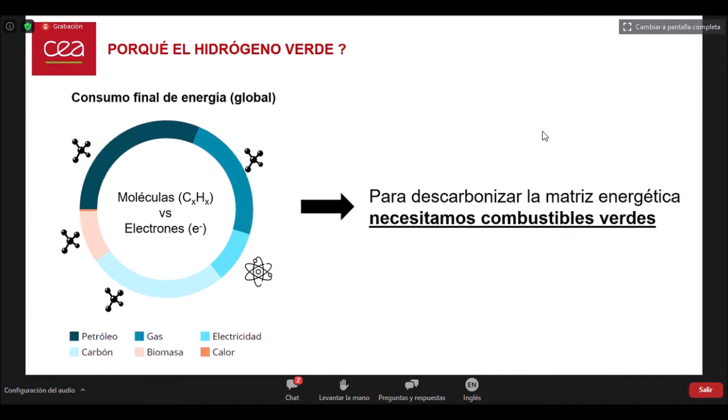Sometimes they talk about zero emissions. I really don't like that term because there's always some emissions. We require materials to produce that energy. We require energy to produce the photovoltaic modules, and that energy has not been decarbonized. So this partly answers Martin's question, and I'll be happy to elaborate later.

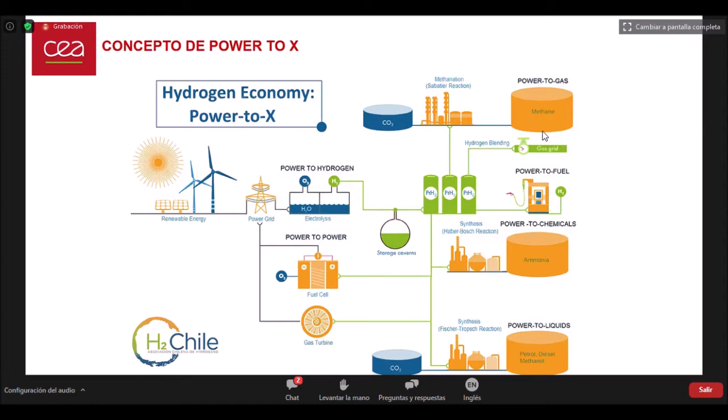Deep down, because of its versatility, hydrogen can be introduced almost anywhere in our energy or power grid. So having explained these concepts around green hydrogen, I want to present to you CEA-LITEN, which is the French Institute for Energy Transition. CEA-LITEN is focused on 4 areas.

Our mission is to support the industry towards energy transition. We were created to support the industry, the private sector. We are a public entity, a public center, but almost half of our budget comes from direct contracts with the industry. How do we do it?

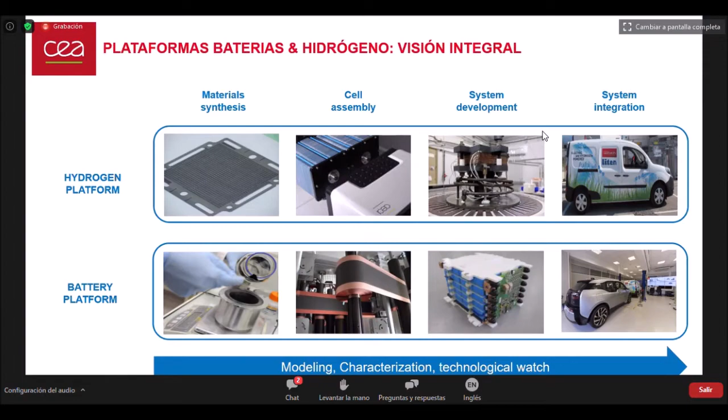We have platforms to test out our technologies and also other commercial technologies to generate techno-financial databases that will allow us to have a future vision of the technologies that are coming and the technologies we need to bet on in the future.

So at the level of hydrogen, our role has been to generate demonstrators and pilot projects with the industry. Here I'm just showing you a few examples.

I would also like to mention the project Hyway, because this project has involved private off-takers and delivery companies. This was the first fleet, and the largest fleet, of hydrogen vehicles that still work, developing the value chain of green hydrogen from production to the final use.

In this case, it is electric mobility. I want to mention this because it allows us to articulate and coordinate the different stakeholders across the value chain, from production to the final use, also involving clients that still do delivery with these vehicles.

I believe that this is important, and this is something that the Chilean government is interested in. To boost the green hydrogen industry, we need to involve all the sectors at an earlier stage, even the clients, the buyers who are going to buy hydrogen.

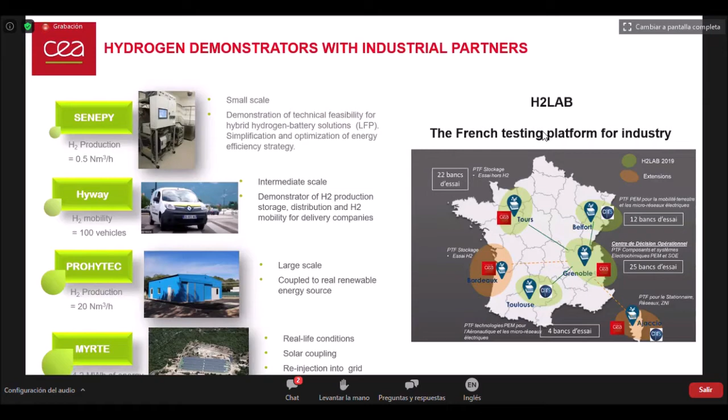This is an example of a successful technology transfer. For the green hydrogen economy, this starts with electrical generation, and we focus mainly on photovoltaic modules. Then we need electrolyzers to produce hydrogen, and then we have fuel cells at the level of end use of hydrogen. These projects take time, about 15 years from the strategic decision, based on our technological surveillance, databases, and all the information we manage, where we decide to focus on a specific technology.

In the case of photovoltaic modules, we focused on a specific technology, which is highly bifacial. At the time, nobody was betting on bifacial, but now most photovoltaic plants being built use this technology, so it was a good bet on our side. It allowed us to develop, from this strategic decision, the technology, the proof of concept, and pilot demonstrators, until we were able to produce this technology, which has been manufactured in Italy. We are testing it out in the Atacama Desert to evaluate the performance of photovoltaic modules in desert conditions, always with the end goal of reducing the cost of photovoltaic energy under desert conditions.

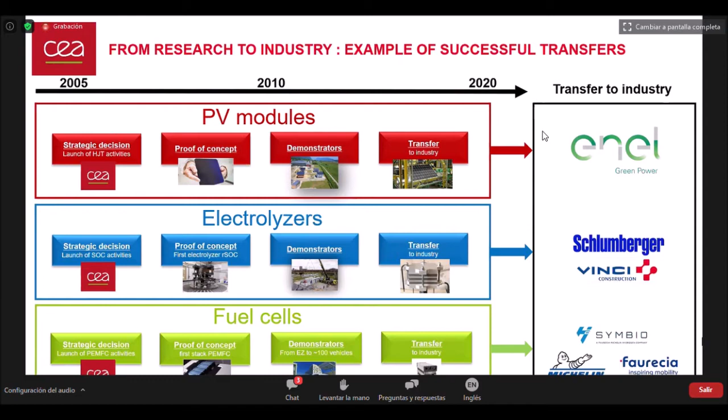Symbio, sorry. It was recently bought by Michelin and Faurecia. At first it was a startup, but it has been bought by Michelin now, so it is no longer a startup - a successful case.

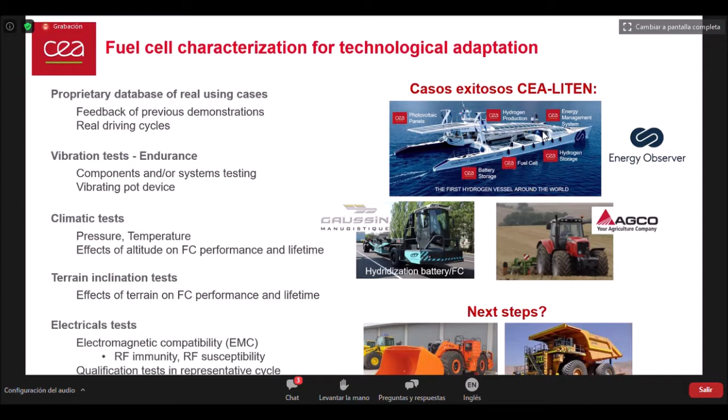We have all the infrastructure to test it out and characterize it: climatic tests, vibration tests, terrain inclination tests. Our goal in Chile, as mentioned by Martin, there's a very important theme in terms of mining trucks and the electrification of these mining trucks. Our goal is to support the industry in developing technologies adapted to altitude, as many mining operations work in specific terrains and at very high altitudes, requiring technological adaptation.

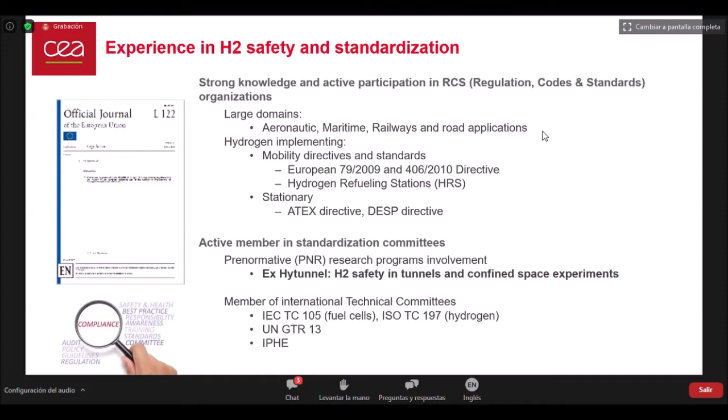We have several experts in terms of security standardization worldwide. We can share that experience in Chile and Latin America. Our intention is to contribute that experience in everything related to regulation and standardization of green hydrogen in the economy. This is just an example from the battery session.

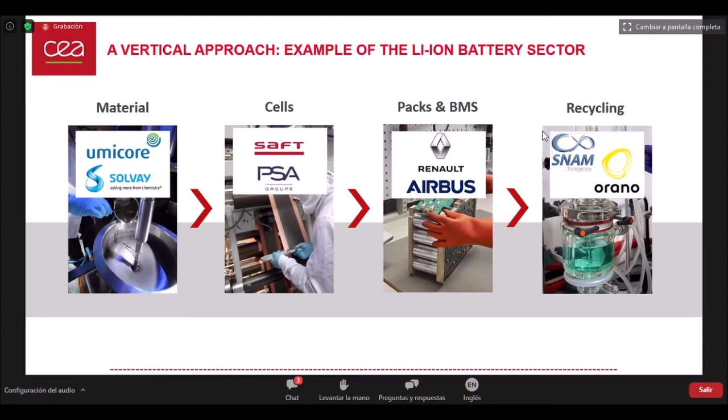Just to show you, we also have a role as industry coordinator across the value chain in the economic sector, in the case of lithium batteries. Unfortunately, I have a slide for hydrogen as well, but I can't show it yet because there's some confidential work with certain researchers.

Just to finish: how do we support the industry? Through technology transfer of intellectual property, knowledge, characterization of technologies, testing, improvement, adaptation of technologies, and we can also provide training. In Chile, we have that, we've been doing it, and we intend to continue strongly training in Chile and Latin America.

For example, the picture you can see here is a pilot plant of photovoltaic modules in the French Alps, which served to train the people of Enel so that they could have their own factory of modules in Italy.

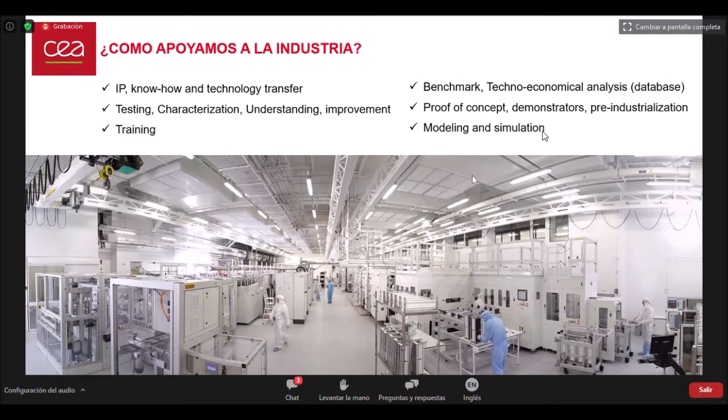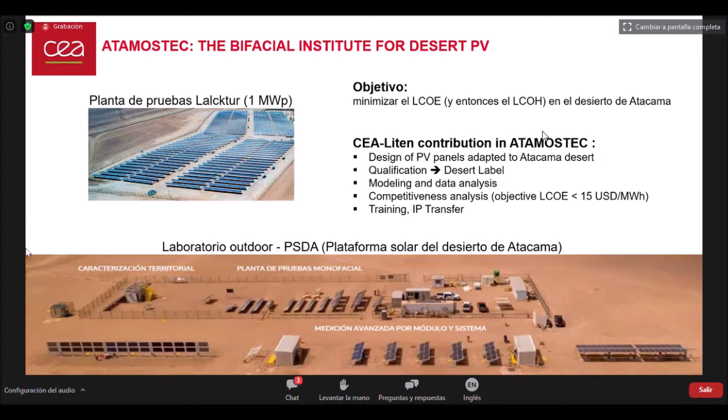Of course, we can also do technological benchmarking, technical and economic analysis, etc. I just wanted to mention the Atamostec project that brought us to Chile. Atamostec is one of the programs mentioned by the Chilean government, which I think stands for the Institute of Bifacial for the Desert. The objective of Atamostec is to minimize the cost of electric energy and green hydrogen in desert conditions, so we have test plants at the industrial level and also at a smaller level to test different technologies in desert conditions.

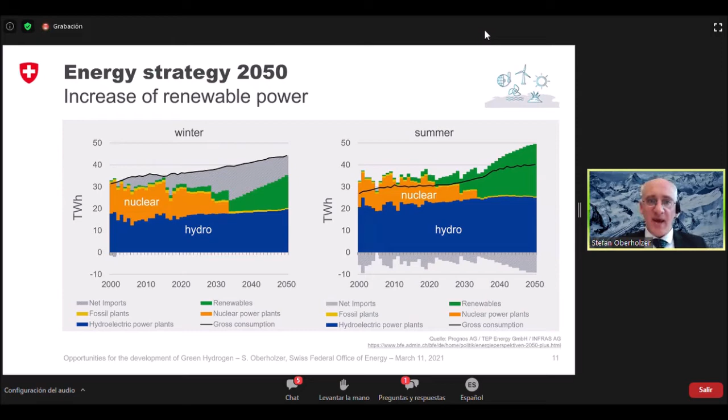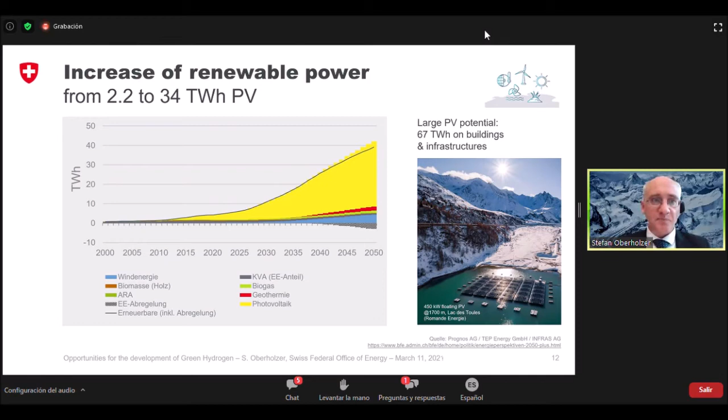Si hablamos del hidrógeno verde y vemos los detalles de las perspectivas energéticas al 2050, los proveedores de energía basados en electricidad, que incluyen hidrógeno, se necesitan para llegar a este objetivo cero, especialmente en el sector de transporte. Necesitamos socios y dependemos mucho de la producción nacional, pero también hay hidrógeno que se importará. Aún no queda claro de dónde vendrá, cómo vendrá, si será a través de la matriz de gas o líquido o amoníaco u otros vectores. No tenemos una estrategia nacional aún, sin embargo se nos pide desarrollar esto a nivel de políticas.

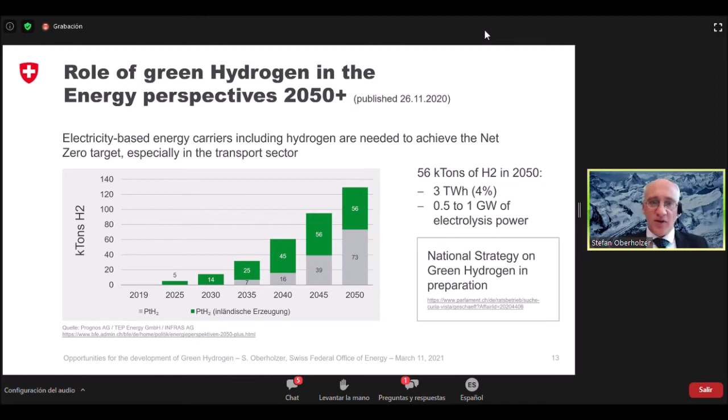En la siguiente sección les voy a dar un vistazo general muy breve acerca del hidrógeno en general en Suiza. Alrededor del 95% del hidrógeno que utilizamos a la fecha hoy en Suiza es fósil o gris, y se produce principalmente por refinerías y se consume directamente allí.

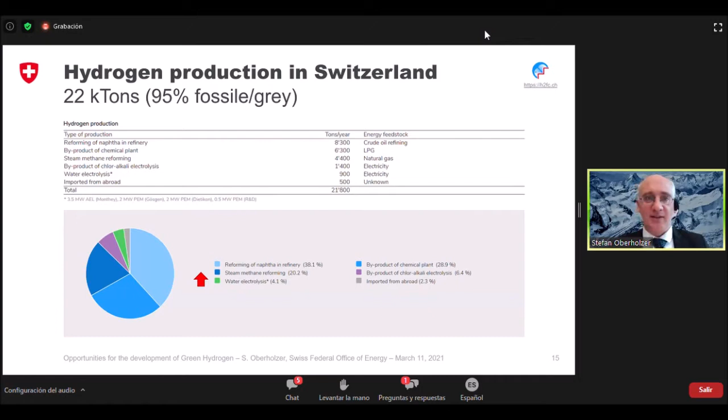Lo que vemos aquí es que por primera vez también la electrólisis empieza a surgir, alrededor del 4%, y es verde en el sentido de que se utiliza electricidad o energía que tiene una huella de carbono muy baja, porque la energía hidroeléctrica es de alguna forma la mejor. Como se había dicho antes, se utiliza en refinerías, pero también en la industria química o farmacéutica o en la industria de procesamiento de metales.

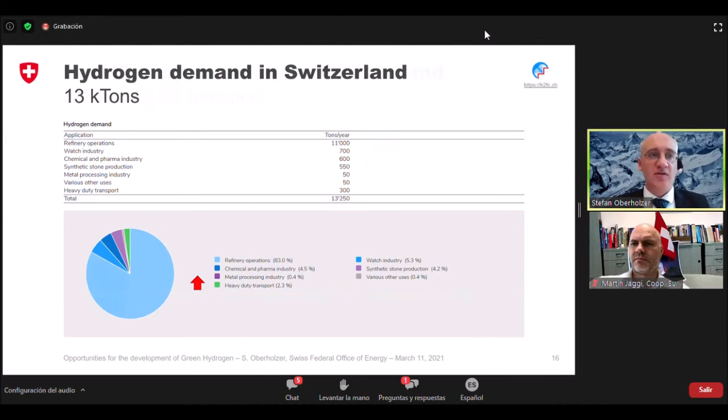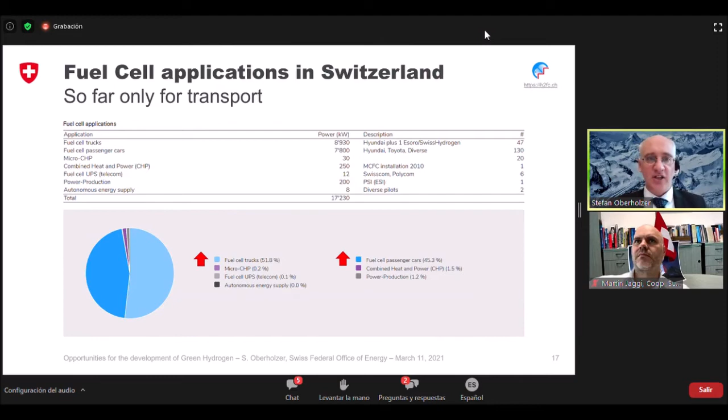Lo que también se ve aquí por primera vez es el transporte pesado, que realmente está creciendo en aplicaciones de celdas o pilas de combustible. Las celdas de combustible se utilizan en Suiza solamente para el transporte ahora. Ha habido algunas pequeñas aplicaciones para calor combinado y energía, pero no como en otros países. También hay algunas aplicaciones fuera de la red eléctrica, como por ejemplo para respaldo de telecomunicaciones, pero lo principal, como ustedes pueden ver en azul y en celeste, es para el sector transportes.

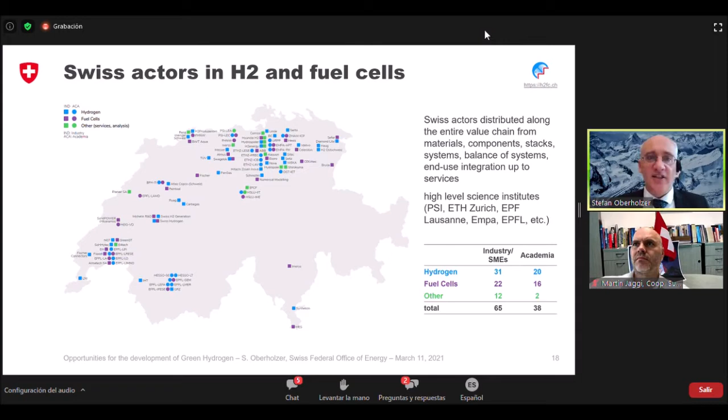En este mapa no quiero entrar en los detalles porque ustedes van a encontrar la información en esta página web. Incluso aquí pueden ver un vistazo general de los actores de la industria y del área de investigación. El mensaje que quiero transmitirles es que hay muchos actores y no son los grandes actores, los fabricantes de equipos originales como en otros países, sino que también son empresas especializadas, pequeñas y medianas, que son activas aquí, y también hay centros de investigación altamente calificados.

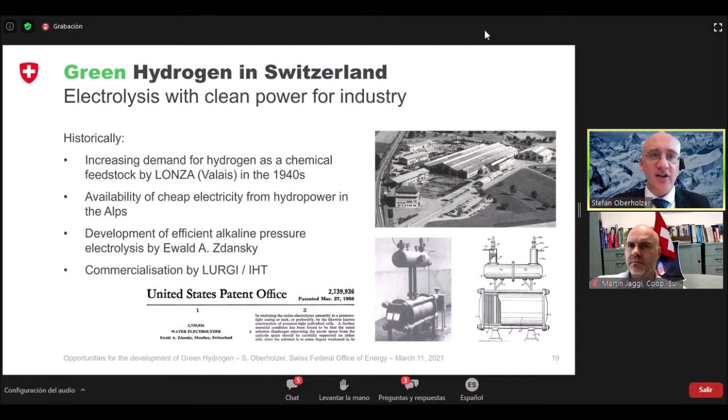Con respecto al hidrógeno verde en Suiza, esto tiene una historia muy larga. Ha habido una demanda creciente en el último siglo, alrededor de 1940, para utilizar el hidrógeno en Suiza como alimentación química, de hecho para la producción de amoníaco, y al mismo tiempo había la disponibilidad de electricidad barata de la energía hidroeléctrica que se construyó en ese momento en los Alpes. Entonces había la idea de desarrollar una electrólisis de presión alcalina eficiente para mejorar el hidrógeno per se, y esto de hecho acabó en la comercialización por parte de LURGI con una tecnología de electrólisis eficiente. Esta tecnología de electrólisis de hecho sigue siendo utilizada, como ustedes pueden ver aquí.

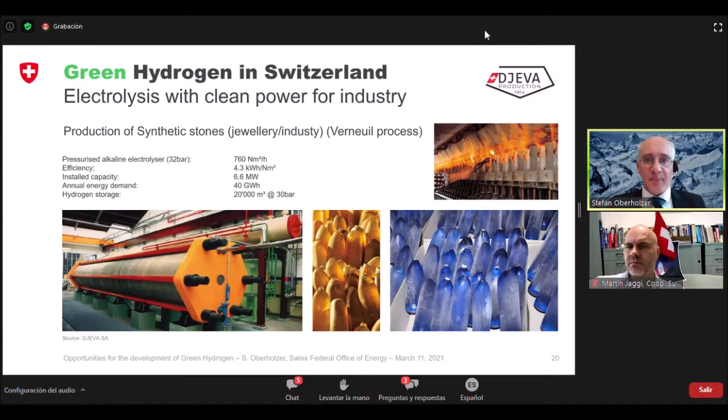Lo que ustedes ven en la foto es el electrolizador más grande de Europa, uno de los más grandes del mundo, de 4.3 megawatts, y dos de ellos siguen estando en operación. 6.6 megawatts, perdón, y es una empresa que produce piedras sintéticas, zafiros, etcétera, y se necesita el hidrógeno como fuente para producir calor de alta temperatura. Esta tecnología, de hecho, ha sido comprada hace unos cuantos meses por una empresa alemana que se llama Sunfire, y lo que quiero mostrar aquí son las diferentes tecnologías de electrólisis para la producción de hidrógeno.

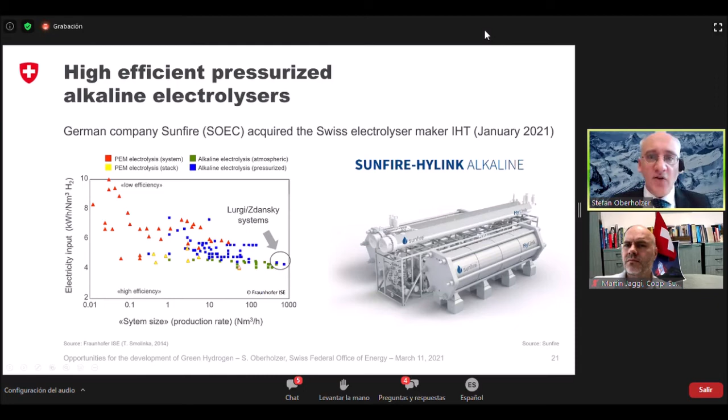Por lo tanto, en los siguientes años vamos a tener 20, 40 megawatts que vienen, y lo mismo es cierto para todo el continente europeo. Veo muchas iniciativas que están en curso. Con respecto a la investigación, también estamos apoyando proyectos que abordan el hidrógeno verde de otras fuentes que no son la energía eléctrica, principalmente solar, directamente.

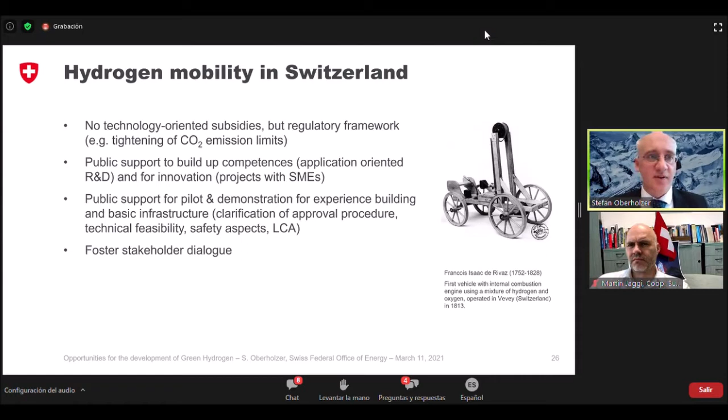Lamentablemente, ya no está en curso, se ha detenido, pero muestra una gran confiabilidad operativa, y la experiencia de aquí también se está utilizando ahora en otros proyectos.

Para los camiones, tenemos un par de proyectos del año 2016 al año 2020, algunas demostraciones para demostrar cómo es que funciona producir hidrógeno verde de energía de corriente de río, cómo almacenarlo, cómo producir las primeras estaciones de recarga de hidrógeno que estaban completamente integradas y realmente accesibles por el público, y una estación de investigación y desarrollo, y también un camión piloto que fue construido para demostrar toda la cadena.

A la fecha es Hyundai que entrega los camiones a Suiza. El despliegue de la infraestructura está en curso, es decir, 6 estaciones de recarga de hidrógeno ya están operativas, y eso ha sido desarrollado en el marco de tiempo de 2 años, principalmente sin subsidios, y se basa en un modelo de negocios que se va a presentar el día de mañana.

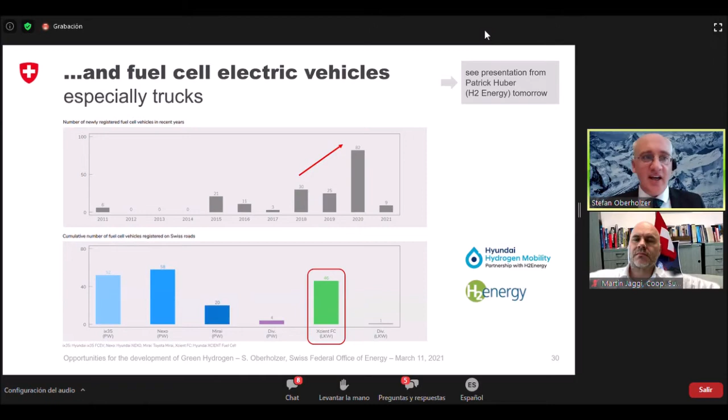Energía a gas también se mencionó antes. En la charla previa también hay actividades en este campo. Por ejemplo, un proyecto grande de 2.5 megawatts, electrólisis PEM, que utiliza el CO2 de una planta de agua residual para producir gas sintético, y este gas sintético luego va a alimentar la red de gas que se utiliza para calefacción y otras aplicaciones. Por lo tanto, no tiene nada que ver con movilidad.

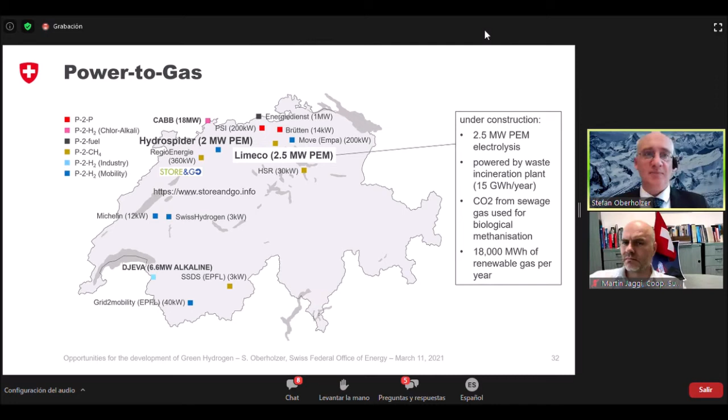Sin embargo, el motor principal para el hidrógeno en Suiza es la movilidad. Finalmente, unas cuantas palabras de nuestros programas. Tenemos varios programas diferentes en la oficina suiza de energía para apoyar la investigación, el pilotaje y demostración en diferentes tecnologías, 1 o 2 programas también para hidrógeno y celdas de combustible.

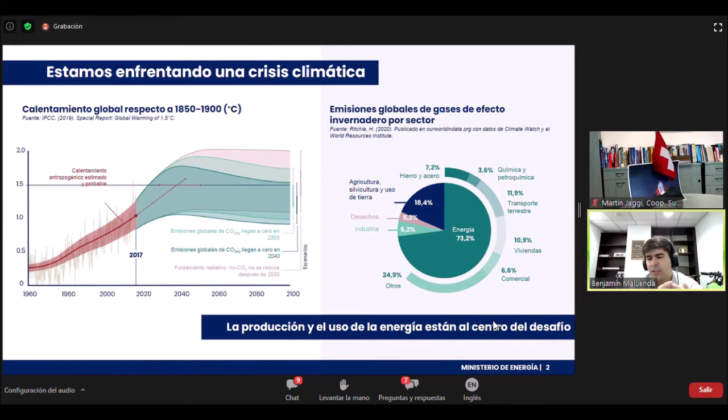And this is where hydrogen becomes an interesting resource or alternative.

Our work in the ministry is based on the characteristics of our country. I insist that many of what I'm going to say for Chile can also be applied to many countries of the region which have a similar geography, and they share similar geographic characteristics. We have a very good potential for renewable energy, solar, photovoltaic, wind, geothermal, sea energy. There's a lot of energy wealth and richness in this country.

And what is interesting about this, and this actually generated the interest of the Ministry of Energy, is that the potential of renewable energy significantly exceeds the capacity we have to consume it. All the potential of renewable electrical power of Chile, which is over 1,800 gigawatts, exceeds 70 times the capacity of our current system. So even if this electrical system continues growing and we electrify consumption, we will never be able to take advantage of all this wealth of renewable resources.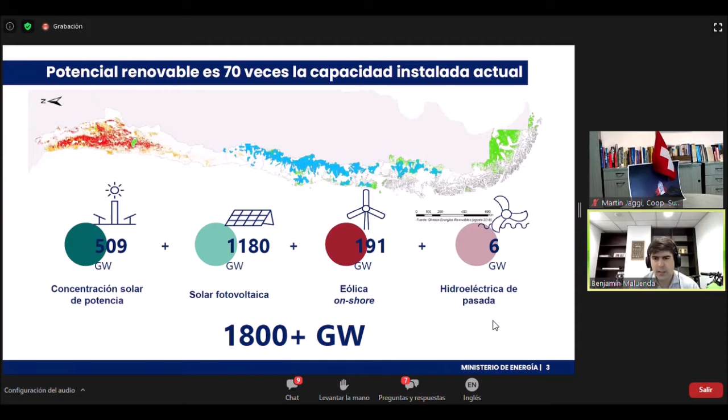So we need to find a way to take advantage of these resources to produce something, to have a sustainable renewable economy, and hydrogen becomes an appealing option to do so.

Why? Because hydrogen is a way of packaging electrons, renewable electrons, into molecules, gas molecules in atmosphere conditions that can be compressed, it can be liquefied, it can be transformed into other products for transportation, and they can be used in a number of various applications.

My predecessors have already significantly explained these applications, so I am not going to repeat them, but the important concept here is to think about hydrogen as a renewable energy carrier, to put renewable energy into consumptions and technologies that have historically never used renewable electrical power.

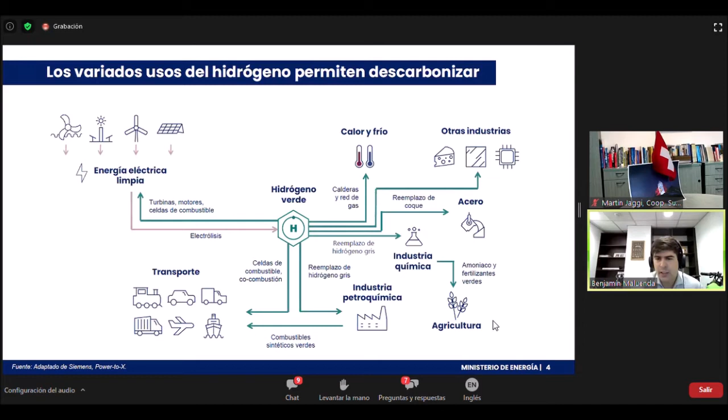So we always need to remember that hydrogen in the end is a means to decarbonize, and it is not an end by itself. So why do we have so much interest on this in Chile? And why is it that we decided to launch this strategy?

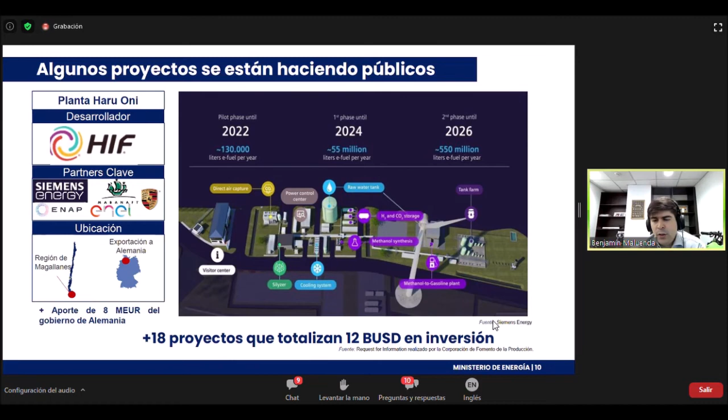We have also identified many other investment projects that are under development, but they are still confidential. And this strategy is based on several pillars.

Once again, I will send you a copy of the presentation to read at your own pace. But we have generated a plan of action based on this, which is quite ambitious, but hopefully it will help us materialize the opportunities I have explained before.

We have broken down our action plan into 4 lines of work: regulation and permits, financing and incentives, domestic demand and international partnerships, and local development. On these 4 areas there's a lot that can be done, and there are other important areas.

What I'm going to show you now is just our short-term focus for 2021. Evidently there are many other actions that we should also take. I will focus on one action per axis, so I cannot elaborate on this. In the Q&A session you can ask me more about this.

In terms of regulation and permits, our focus is to develop all the necessary standards and regulations as soon as possible so we can reduce the risk of developing projects. So investors, developers, researchers, providers, suppliers, everybody knows the rules of the game beforehand, so they can make decisions on investing, doing research, and doing business.

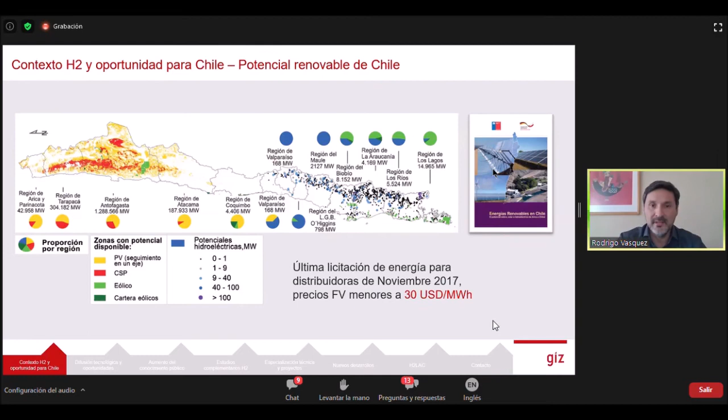Well, here we do not see the Patagonia region, but in the south we have a lot of wind, and we can generate a lot of energy, many times more than what we have or what we demand. Therefore, all of this energy can be sent to a green hydrogen market to be used in the country and also to export to other markets.

Now, how did we start to socialize this? It is true that there were a lot of previous meetings before the first conference, and we started talking about doing some sort of workshop or technical meetings. But there was so much interest that in 2017 an international conference was held, and more than 120 companies arrived and asked what this was about and why we were interested in showing this, and what were the potentials. Then later there was a snowball effect.

Then in 2018, we organized together with the Ministry of Energy a second conference, and we had more than 420 participants, most of them companies, people with good connections. A lot of international people came to give presentations here in Chile, to talk about the projects they had, the ideas, the trends at the international level. I think that was the starting point for all of the development we are seeing now, all of the conversations, all of the planning of all of the companies here in Chile.

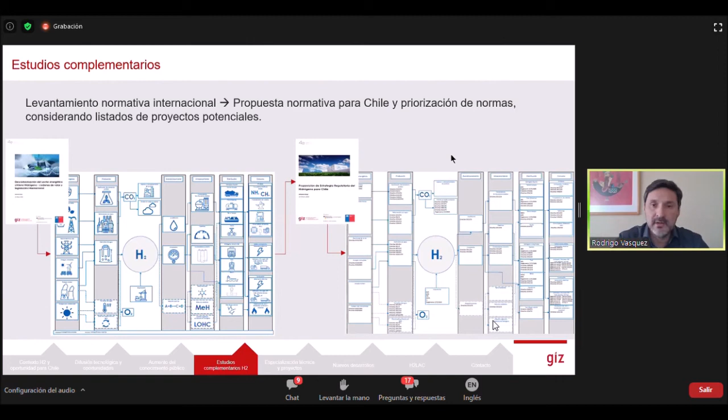What was important was to make a match with the projects that were ongoing and how we could prioritize the regulatory advancement. On the other hand, and this was the initial question, what are the environmental impacts of hydrogen projects? In that regard, we also made a study to identify what impacts these projects could generate in the future.

That meant analyzing the value chain. What was determined was that, as an element to generate hydrogen, the projects have a very low impact, but the impact is in the storage of hydrogen, or also the construction, or electricity generation, and everything related to transmission. Therefore, hydrogen's perspective is very good in environmental terms, not only in terms of its usage, but also in the building of the projects.

Now, regarding financing sources, there is the option of climatic financing, and there could be a generation of a list of green financing sources. Chile is a country that has graduated in terms of this type of cooperation, and Chile can actually apply to these funds to generate these types of projects in the region.

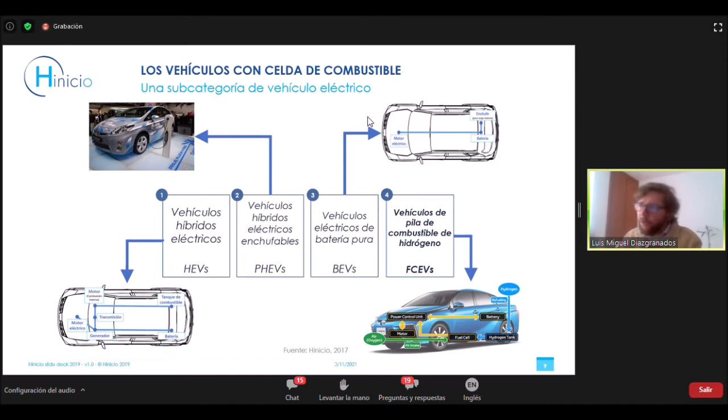An important topic is hydrogen. We know the funds for hydrogen always have their feet on the ground. We know this is done step by step. But what is important is what will be the results of it, in terms of employment, what we will receive as a country, not only because of the projects, but also the export, etc. So what about electrical vehicles at the end of the day here? I would like to tell you more about this.

So how does a fuel cell vehicle work? First of all, we use hydrogen, which is refueled in tanks. This hydrogen is typically refueled or recharged in all the models we currently have. 99% are recharged in a gas manner, but at very high pressures, at 350 bars. It could be 350 of atmospheric pressure up to 700 bar. We're talking about a lot of pressure.

Why? Because hydrogen has a high energy per unit of weight. If we take 1 kilogram of hydrogen versus, for instance, 1 kilogram of diesel, the kilogram of hydrogen is going to have 3 times the energy of the diesel kilogram. Nevertheless, it is an element which is not very dense, the lightest element of the periodic table. Under normal atmospheric conditions, 1 kilogram of hydrogen is equivalent to about 11 cubic meters of volume. We do not have the space in a vehicle for 11 cubic meters, so we need to compress this hydrogen to take those kilograms of energy and fit them into a smaller volume. That is why we use high pressure tanks for hydrogen powered vehicles.

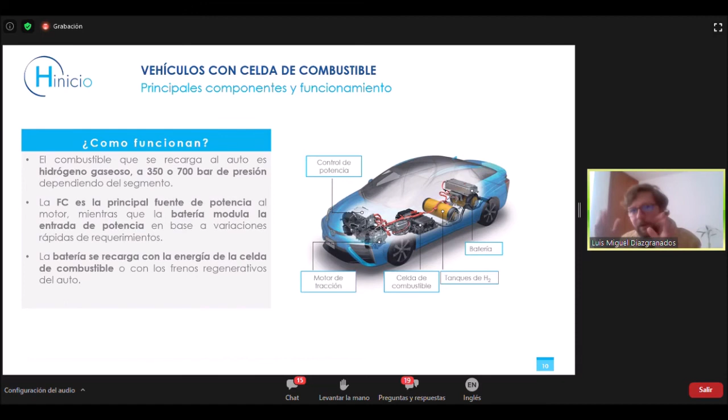But when we have a downslope, the power required is much less. The fuel cell keeps operating at its optimum point, but the difference in electricity is used to recharge the battery. In this case, the battery does not need to be connected to the grid or to a charging point; everything works with the electrical charge. So this is the vehicle, and all this energy goes to an electrical engine. Here we are showing it for a light duty vehicle, but the same logic applies to all other vehicles.

So what are the differences between hydrogen and battery-operated vehicles? Well, there are some from the technical perspective, but from the operational point of view, battery-operated vehicles have recharging times that are very high. A rapid recharge could be half an hour or 40 minutes, and a slow recharge 8 hours. These recharges give us autonomies that are relatively low, maybe 200 to 300, nowadays 300 to 400, but there are limits to the autonomy a battery-operated vehicle can deliver.

However, the hydrogen-operated vehicle can recharge at very high speeds, equivalent to recharging at a petrol station. As I said before, hydrogen is an excellent way to accumulate and store energy. We could have autonomies a lot larger than what we'd have for battery-operated vehicles. For light-duty vehicles, we could be speaking of 550, 750 kilometers - autonomies that are very large and facilitate the operation of the vehicles.

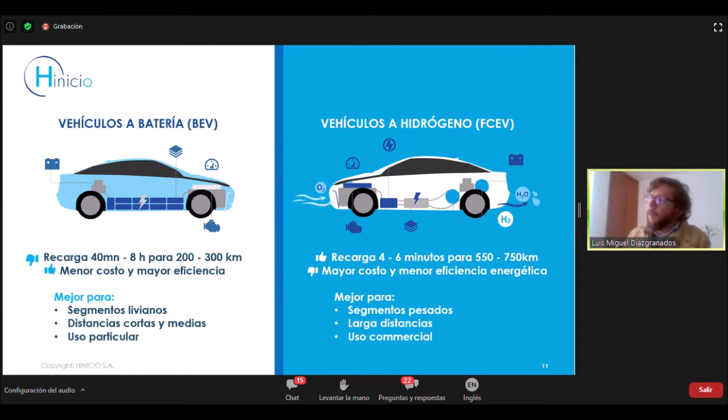And we're also talking about interurban coaches moving every day and commercial uses. These are vehicles that are used very intensively, and they do not necessarily have 8 hours to charge all the time. Every hour is gold, so they need very short charge periods. For those uses, we can see the potential of the hydrogen vehicle.

Just to show you precisely, at the end of 2019 the record was broken for distance in a hydrogen vehicle with only one charge - almost 800 kilometers. So these autonomies are not only what appears on the spreadsheet from the manufacturers, but it has actually been shown they can be reached in real use.

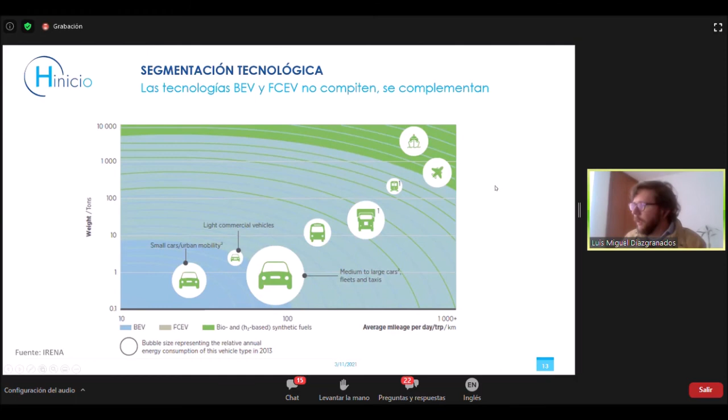As we can see, light vehicles are more located in the area of battery-operated vehicles, heavy vehicles are in the hydrogen sphere, and aviation and maritime mobility are in the area of other fuels, e-fuels. That gives us an idea of what hydrogen mobility is. Hopefully this helped you understand it.

But specifically, we are going to address the economic issues and market-related issues that apply here. In the market, there are several models available of hydrogen-based vehicles.

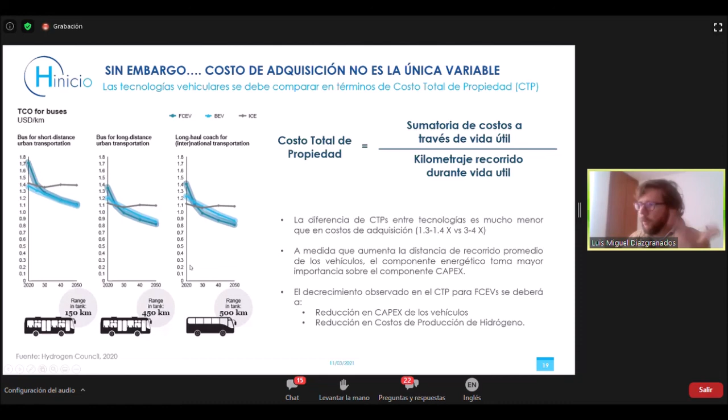So that is due to 2 factors: the reduction in the capex for vehicles. Approximately 60% of the acquisition cost of a fuel cell vehicle is based on technological components, and there's still a lot of space to reduce costs. For example, we have the battery, the fuel cell, the tanks to store hydrogen, etc.

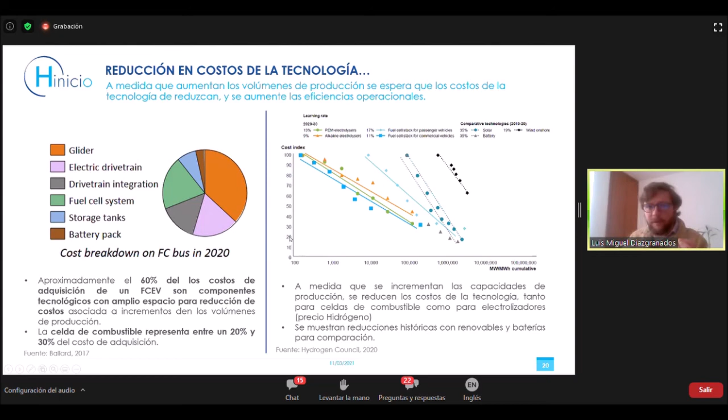And well, the fuel cell represents 20 to 30%. So we can see that up to 60% could be the reduction of the value of the vehicle, that is to say, the cost of the capex. And on the other hand, what we also see is as the capacities increase for the production of hydrogen technologies, well, we will expect for the cost of fuel cells to be reduced as well as the electrolyzers. And what we can see is that these reductions will be very important, and therefore we can expect a reduction in the capex of vehicles.

And that is shown, for instance, with this example of the H2 Bus Consortium, which is a consortium of companies in Europe, producers of buses, hydrogen, storage tanks and fuel cells, etc., that are proposing that we are going to be able to have hydrogen-based buses around $450,000, that is to say 375,000 euros, more or less, in 2025, precisely because they expect the numbers to grow extensively.

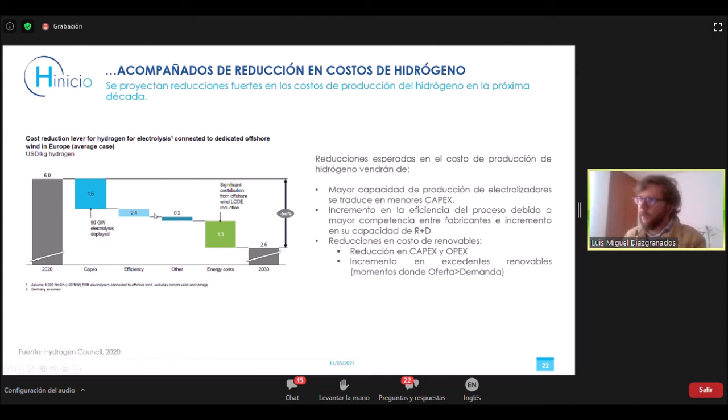On the other hand, there will be a reduction in hydrogen costs, and Rodrigo has already talked about it in the session before mine, so I won't delve into that. But we do expect to have reductions in the capex of electrolyzers, and also we expect to have improvements in the efficiency, and also to have costs of renewable energy that are lower in the future, and that will be translated in hydrogen that will be more economical, and that will be translated in lower energy costs for the bus or for the truck based on fuel cells.

Hopefully this gave you an overview of the costs, advantages and disadvantages of mobility in terms of fuel cells. There is a lot to say, and it was just a summary so I could meet the allotted time. But I think with this information we can start thinking if this is reasonable, what it can be used for, and what it cannot be used for. Maybe in your cities it could be used, maybe not. This was just to give you an idea.

To finish, I would like to tell you about the progress in Latin America over the past years, and I will concentrate on hydrogen for mobility. I won't delve into what is happening in Chile, because you have been able to see a couple of sessions on the gigantic advances in Chile and all the projects being worked on. But they're not the only ones. There are many countries that have done a lot.

For mobility, one of the most interesting projects is in Costa Rica. Costa Rica is one of the few countries that nowadays has hydrogen-based vehicles operating. They have one bus and four Toyota Mirai operating with green hydrogen, with solar panels, and they are mainly used for tourism. It's a very small project, but they are the only ones operating it right now. Brazil has some as well, but it's mainly in Costa Rica.